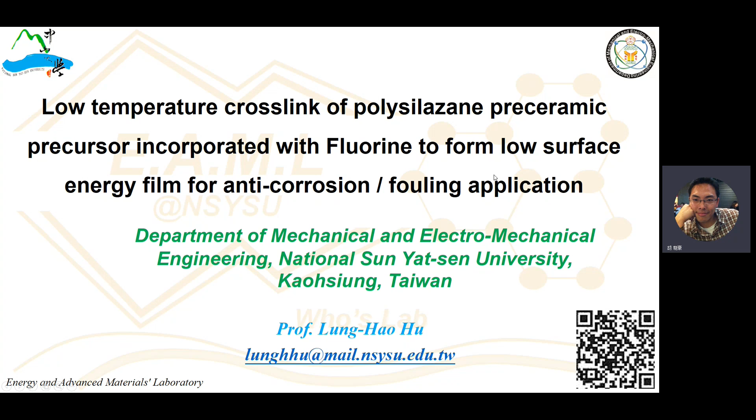As we know, there's some hydrophobic surfaces in nature, such as lotus leaves and butterfly wings. There are applications in our daily life too, such as prevention of snow adhesion, stain resistance, and self-cleaning windows. Those hydrophobic applications make our daily life easier, meaning we don't have to clean windows or jeans frequently.

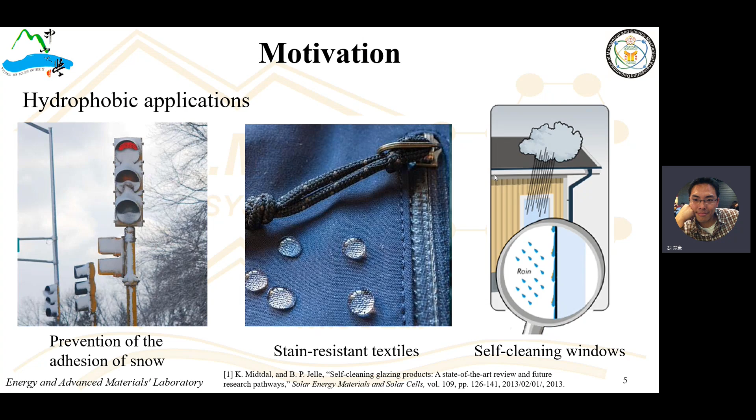The other issue of concern is the corrosion effects. Ships are inevitably polluted by oil pollution, or microorganisms in the ocean attach or stick to the ship's body. Those pollutions or microorganisms sticking to the ship body will reduce the speed of the cruise.

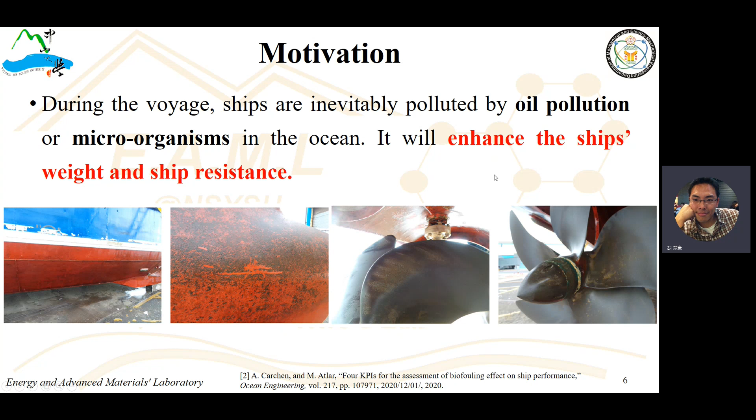Therefore, how to prevent those pollutants or microorganisms from attaching to the body is another issue we have to address, through modifying the surface free energy or the surface property. And of course there's the corrosion issue, as I mentioned.

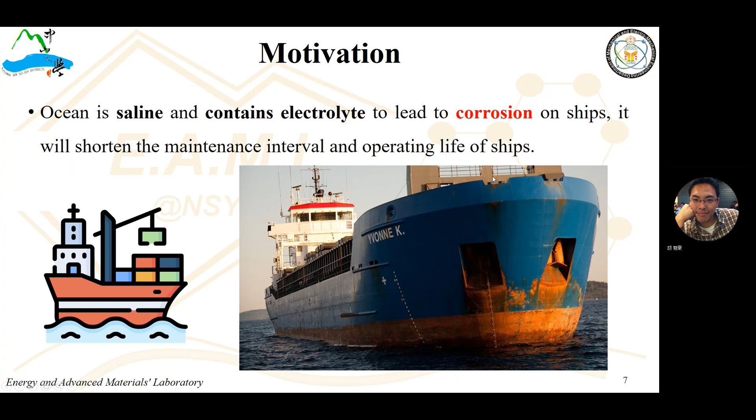For ships immersed in the ocean, the ocean acts like an electrolyte. Over the long term, this electrolyte leads to corrosion in the ship body, and it will shorten the maintenance interval, meaning the maintenance cost increases a lot if the ship body is corroded.

So for this research, I'm going to focus on two functions, or we can call it the dual function — a dual function low surface energy coating. So what's the dual function? One is anti-corrosion, and the other is anti-fouling. The materials we're going to use are called PDC, which I already introduced a lot previously.

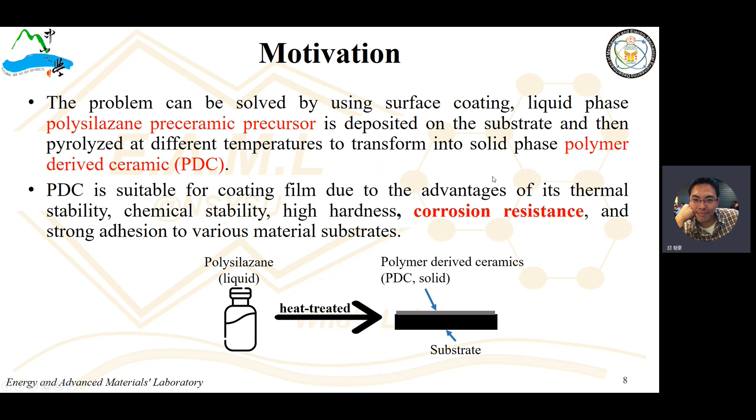In a few previous talks, the precursor is a polysilazane pre-ceramic precursor, and it can be easily deposited on different types of substrates. In this case, we're using a polysilazane, meaning this structure has a silicon-nitrogen bond right here.

If the precursor has polysiloxane, that means we have silicon-oxygen bonds. Oh sorry, I made a mistake, I have to correct it — it's a silicon-nitrogen bond. So it's a silicon-nitrogen bond.

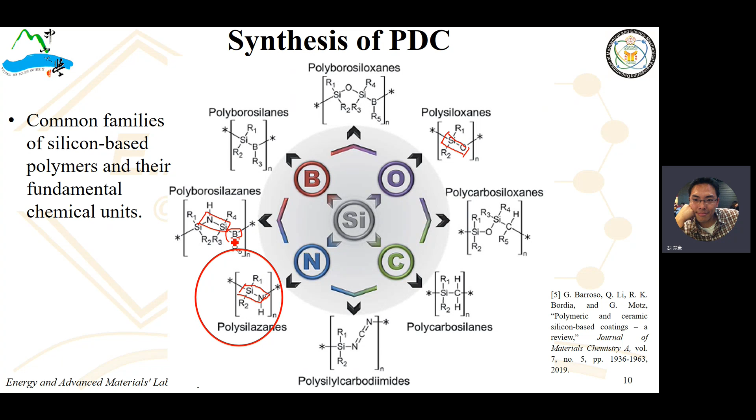And the silicon-nitrogen bond contains boron. So therefore the precursors depend on what's the bonding between the silicon and its functional group, or not.

For the coating techniques of PDC, the techniques include dip coating, spin coating, spray coating, and so on. It depends on what kind of surface you have. If the surface is not uniform with a complex shape, maybe spray coating is the optimum technique for uniform coating on a complex surface. If the surface is porous, maybe dip coating is more suitable.

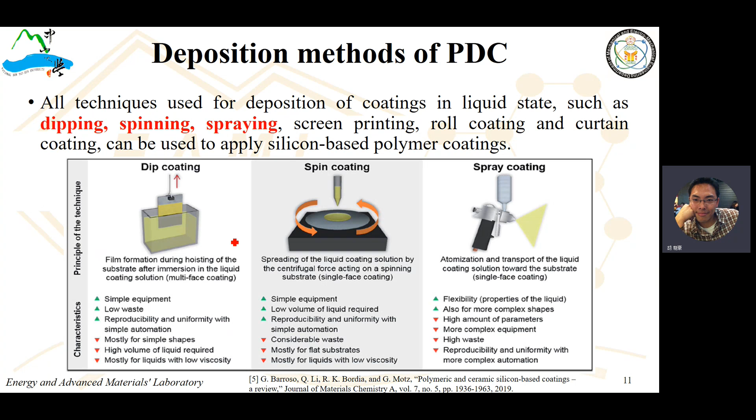The polysilazane pre-ceramic precursor can be commercially available from Merck, and its chemical structure — as I already mentioned — is a silicon-nitrogen bond with different functional groups and contains hydrogen. The polysilazane provides high thermal stability, oxidation resistance, and very good corrosion resistance after pyrolysis.

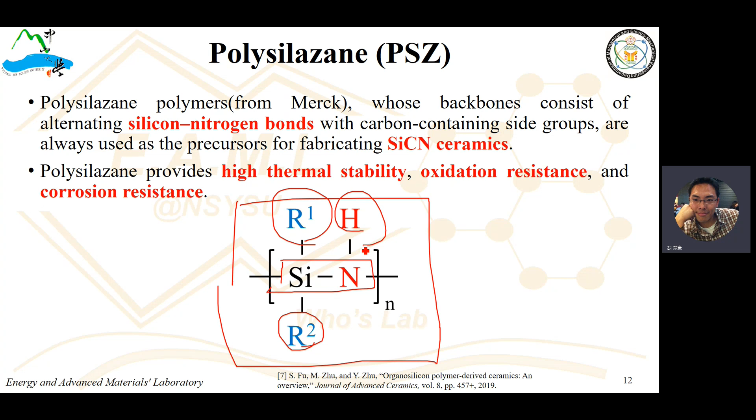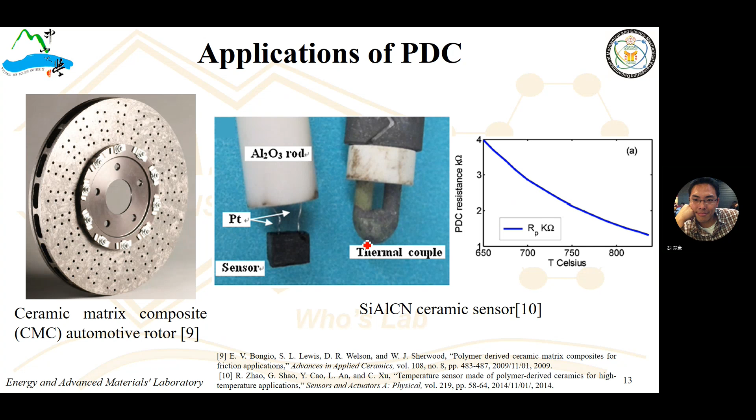There are some applications of PDCs like automotive rotors and some semiconductive sensors, which have already been commercialized. And then there's the fluorine compound — fluorine is the lightest element in the halogens, and because fluorine is electronegative with the greatest attraction for electrons, it forms compounds with other elements easily.

The properties of fluoropolymers are largely derived from the spatial features of the carbon-fluorine bond, which has one of the highest bonding energies. This high bonding energy results in low polarization of carbon-fluorine bonds, which in turn imparts important properties such as low solubility, low friction, high thermal stability, and strong chemical resistance.

The fluorine complex we use is Duravance's AF340, from Rayoung, Taiwan, and it's a fluorinated polysilazane resin. This shows its chemical structure, this fluorinated resin.

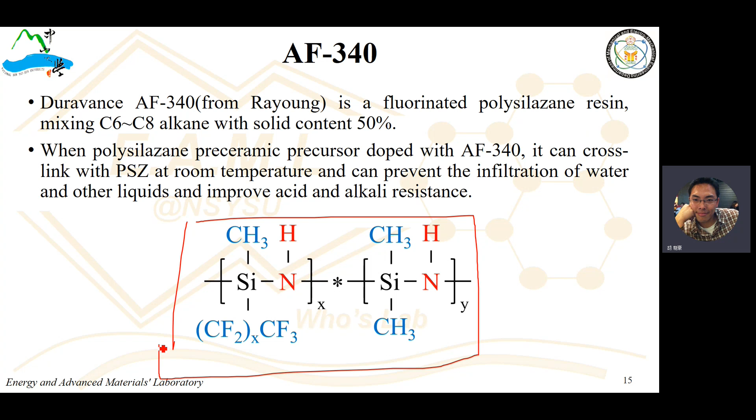When the polysilazane pre-ceramic precursor incorporates with AF-340, it can cross-link with the pre-ceramic precursor at room temperature and prevent infiltration of water and other liquids, improving acid resistance and so on.

The other material I'm going to introduce is titanium dioxide, which represents a type of broad spectrum bactericide with excellent biocompatibility and corrosion resistance. Activation of TiO2 particles with adequate UV light generates electrons and holes that react with adsorbed water and dioxygen molecules to form reactive oxygen species that can kill and inhibit the growth of bacteria.

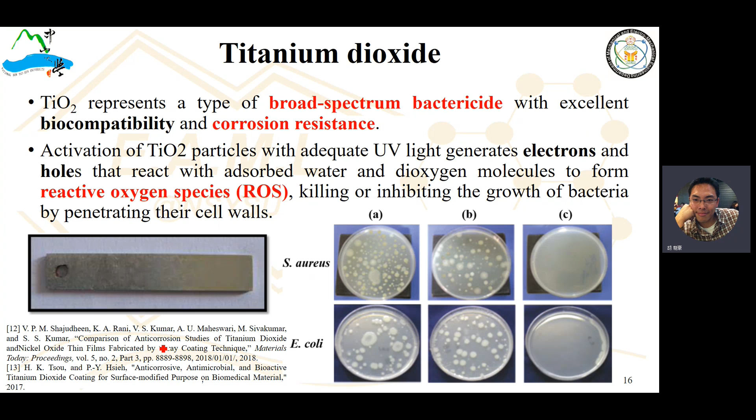The reason I introduce TiO2 is because I'm going to incorporate TiO2 with this polysilazane pre-ceramic precursor, and let's look at what its surface property is.

There's an experiment where we measure the contact angle, with different surfaces of the polysilazane precursor incorporating fluorine or diluted, or incorporating titanium dioxide. We calculate the surface energy by the OWRK method. We measure the contact angle using two types of liquid.

One liquid is water, which is the polar solution. The other one is diiodomethane, which is the dispersed solution. Therefore we can measure the contact angle of the surface, and use a table to find out the surface energy of these two types of liquid, polar and dispersed. And we can calculate the surface free energy.

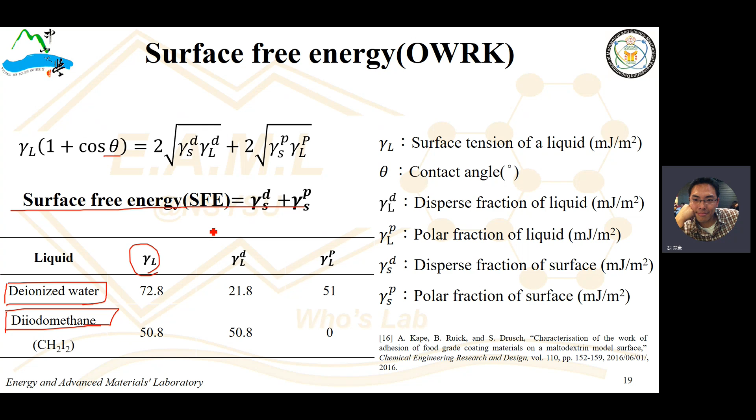Then we use the three electrode system to measure its anti-corrosion ability. The working electrode is copper coated with the polysilazane pre-ceramic precursor incorporated with the fluorinated resin or other things. The counter electrode is platinum, and the reference electrode is silver chloride. We use 0.5 mole of sulfuric acid.

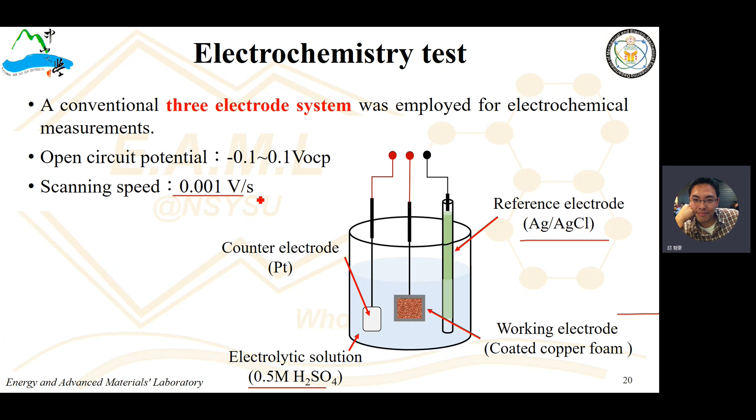We have a fixed scan speed, and we can find the Tafel curve. If we figure out the tangent of the anodic and cathodic polarization curves, we get the intercept right here, and then we can find its corrosion current and corrosion potential.

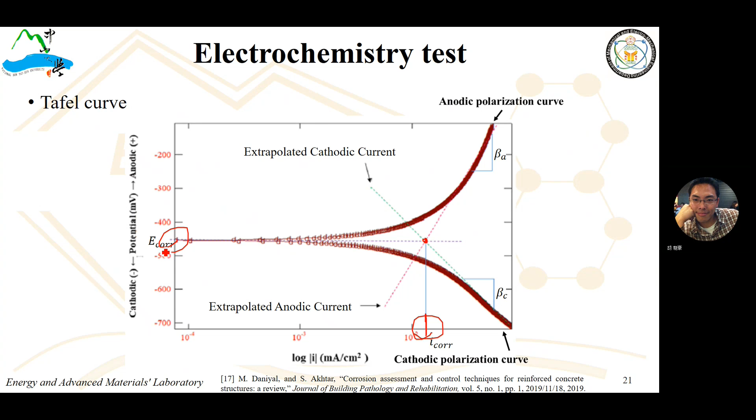Of course, what we desire is the lowest corrosion potential... sorry, that's my mistake, I have to correct it. The higher corrosion potential is what we want, and the lower corrosion current that we want. Then we can calculate its polarization resistance, corrosion rate, and equivalent weight.

Then we use nano indentation to figure out its surface mechanical property. Except for anti-corrosion and anti-fouling, we have to realize whether the surface is relatively strong. Of course it might not be stronger than some metals or alloys, however we have to realize whether it's strong enough.

This is where we use nano indentation to figure out its surface mechanical property. We have indentation tips, diamond pyramid tips, to indent the surface of the polysilazane pre-ceramic precursor after curing or pyrolysis. From its load and displacement curve, we can figure out whether this surface is strong enough or not.

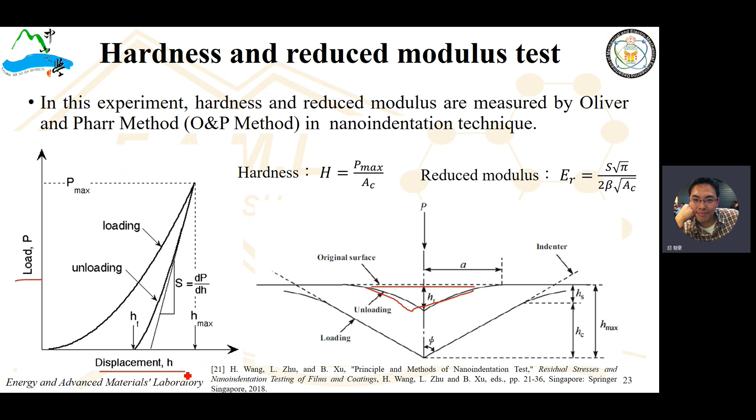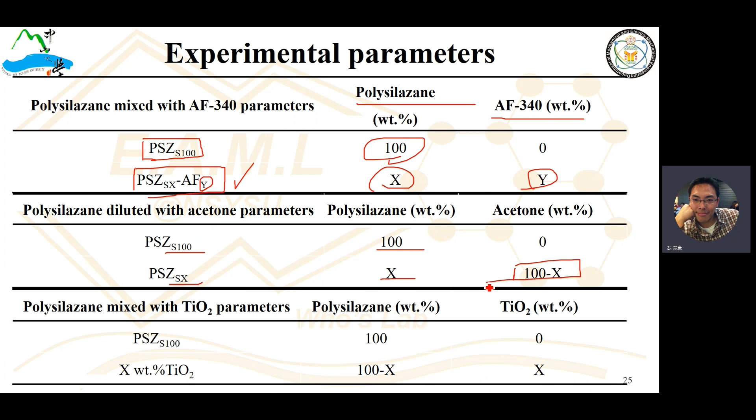Of course we dilute it in acetone. Similarly we have 100% of the pure polysilazane pre-ceramic precursor, and we have the diluted weight percent of the solution, and also the X weight percent of TiO2 mixed with the pre-ceramic precursor.

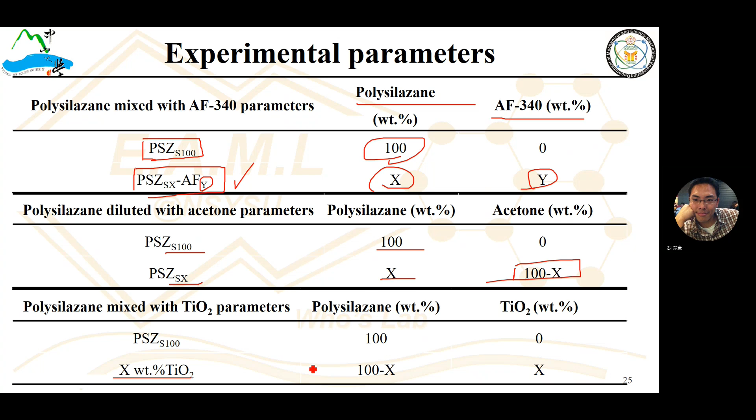Therefore, our experiment will operate below 500 Celsius.

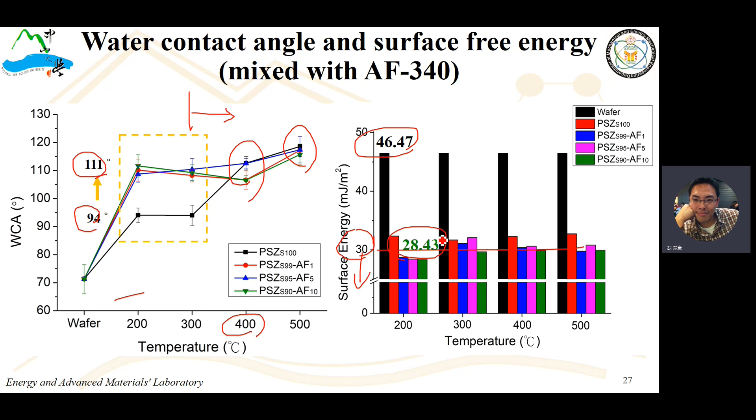So I will just mention that when this surface energy is below 30 millijoule per meter square, the antibacterial effect is generated. So this is the boundary, the limit right here. If the surface energy is below 30, that means the surface can be antifouling or antibacterial.

Oh, I forgot to mention that for hydrophobicity, if the contact angle is less than 90, that means the surface is hydrophilic. And when this contact angle is higher than 90 degrees, that means the surface is hydrophobic.

Of course, there are different criteria for this contact angle. Some will say when the contact angle is higher than 120 it's called super hydrophobic, and some will say it has to be higher than 150 degrees. The contact angle has to be higher than 120 degrees for its hydrophobicity to belong to super hydrophobicity.

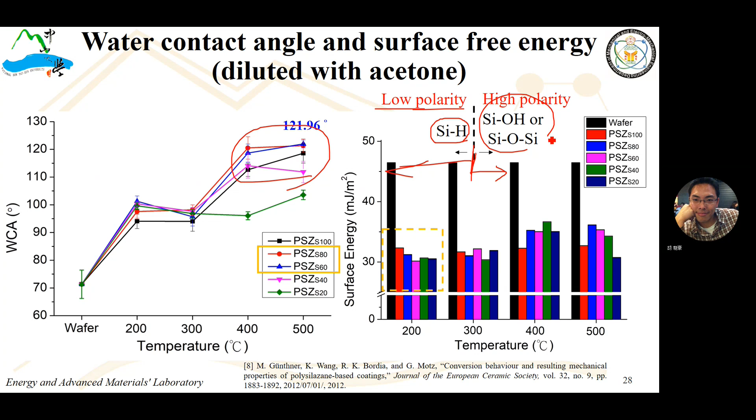However, its contact angle is not very effectively hydrophobic compared with the other compound of the pre-ceramic precursor with fluorinated compound. Well, the Wenzel equation shows the surface roughness factor versus the contact angle.

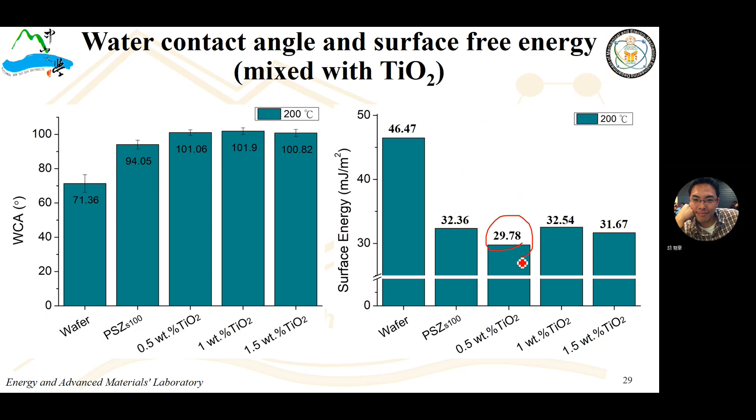And it also reduced the foulant accumulation by 97%. This evidence shows that the TiO2 or the fluorinated particles have the antibacterial effect.

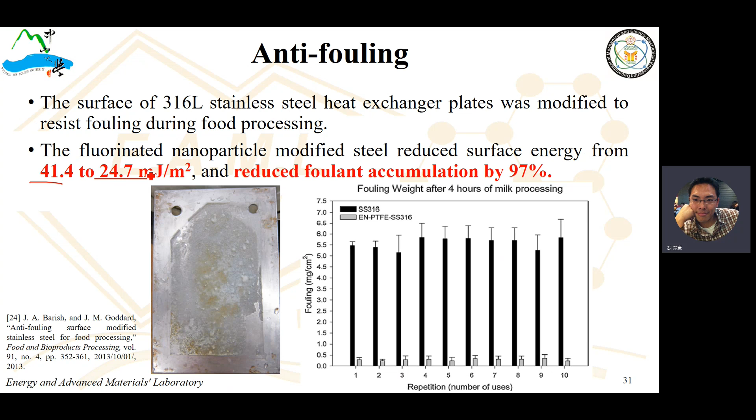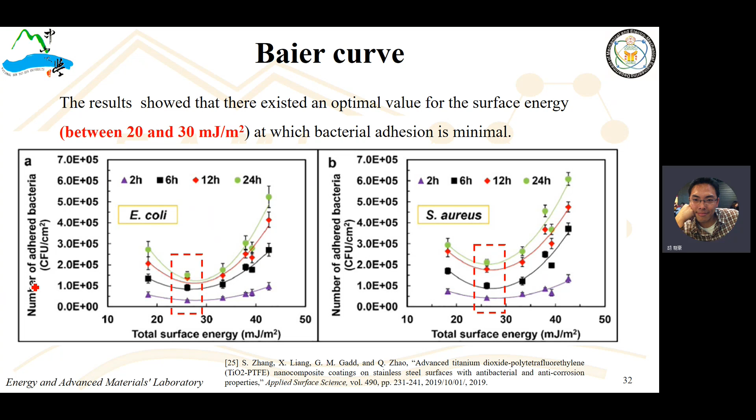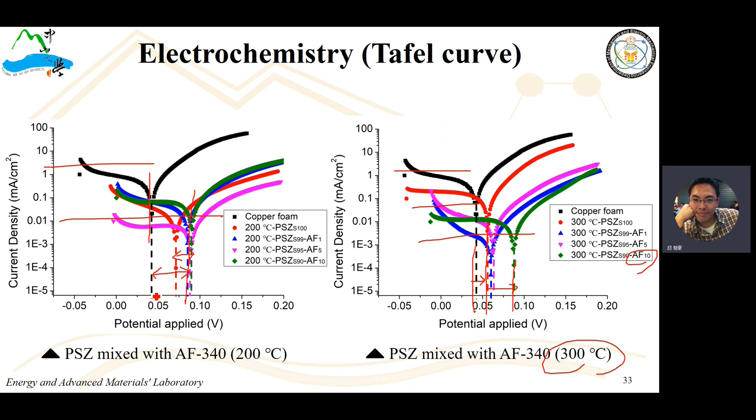Then we compare with other metals or coatings, such as different types of high entropy alloy and SS304. We compare the sample we made, this pre-ceramic precursor incorporated with 1 weight% of the fluorinated compound, cross-linked at 300 and 200 Celsius, and we compare the corrosion rate.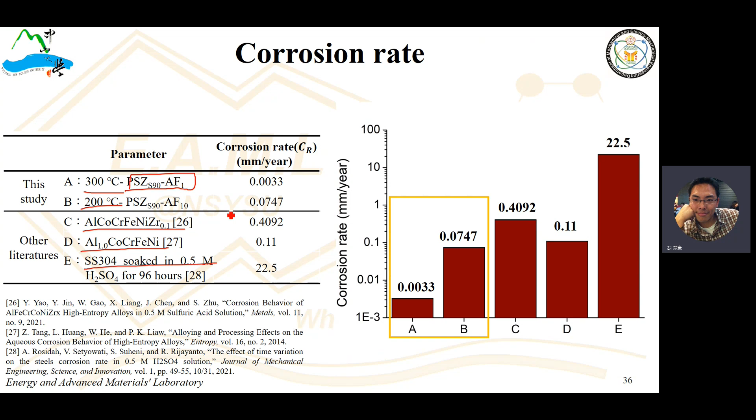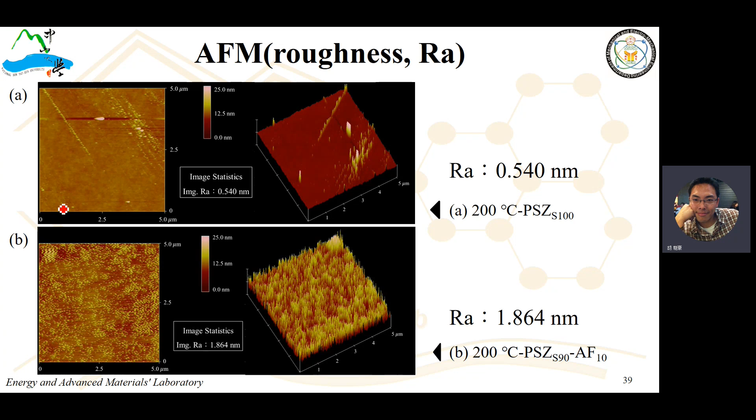When the surface roughness is smaller than 1 micron, we can regard this surface as an ideal, smooth surface, so the surface roughness factor can be neglected. But we don't have to consider whether this surface roughness influences its surface energy or not, if the roughness is smaller than 1 micron.

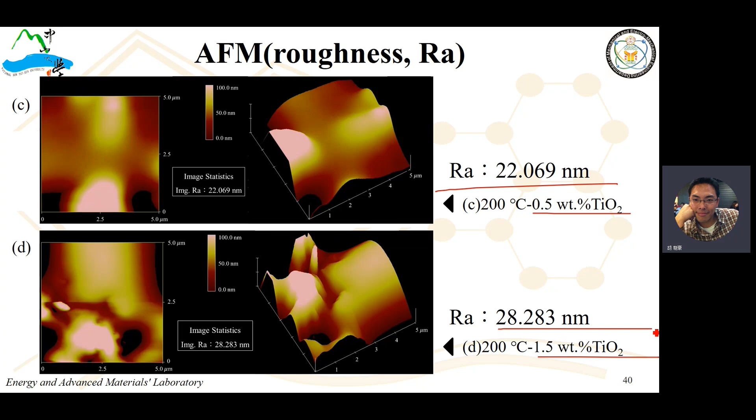Next, let's look at the mechanical property, I mean surface mechanical property, by nano indentation. The maximum load is about 1 millinewton, and we measure an indentation point array of 20 points.

So what do we get? We get the average hardness is higher with the fluorinated resin dopant. However, when the temperature is higher than 300, its surface hardness drops substantially, and when the temperature reaches 500 Celsius, its hardness increases substantially. Why?

Because around 450 to 500, these polymers start to transfer to a ceramic phase, that's the reason the surface hardness increases a lot at 500 Celsius. At that temperature, the fluorinated resin is useless, because it's already decomposed. The reduced modulus has a similar trend: when the fluorinated resin is doped, it has a higher modulus, and when the temperature reaches 400 Celsius, the modulus drops.

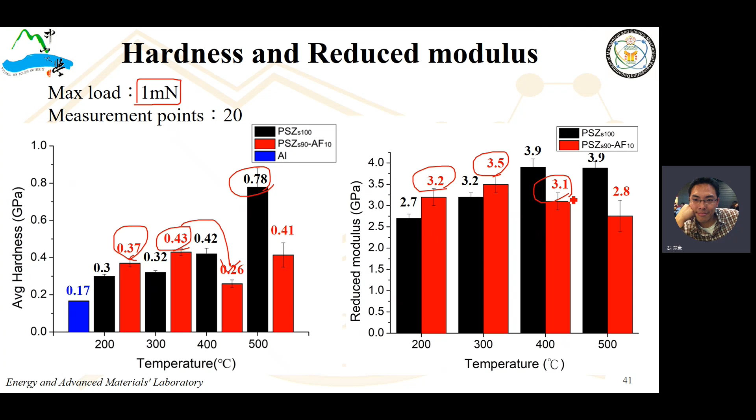This reference shows that when the surface is doped with fluorine gas, its surface hardness and modulus increase with increasing content of fluorine dopant, up to a specific limit. When the fluorine dopant is beyond that limit, the surface properties, hardness and Young's modulus, drop substantially.

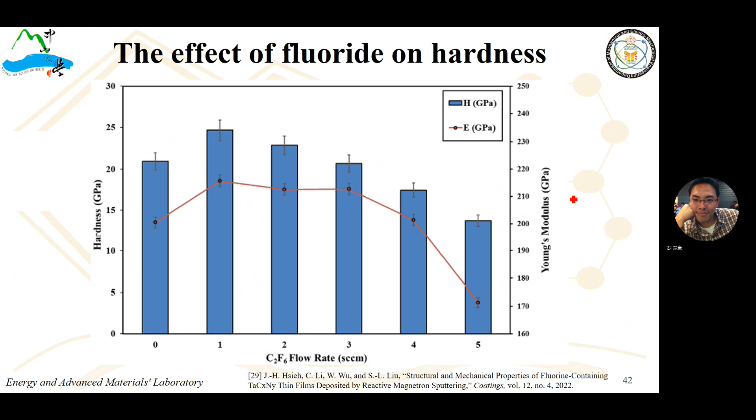We also compared different substrates. Previously we just spin coated this precursor incorporating fluorinated resin, diluted or incorporated with TiO2, and spin coated on silicon. To check whether it's functional on different substrates, we compared it with medium carbon steel, using the same process, same materials, same compound, and spin coating on the medium carbon steel, compared with coating on silicon wafer.

It's quite similar, there's no much difference. Even the contact angle, water contact angle, and the surface free energy show no much big difference. Therefore, I can say most probably it works for different substrates: metals, silicon, glass, and so on.

So the conclusion is that for the pure PSZ, meaning the pure pre-ceramic precursor, the contact angle increased from 94 to 118 with increasing cross-linking or pyrolytic temperature. When this pyrolytic temperature is higher than 500 Celsius, the contact angle drops.

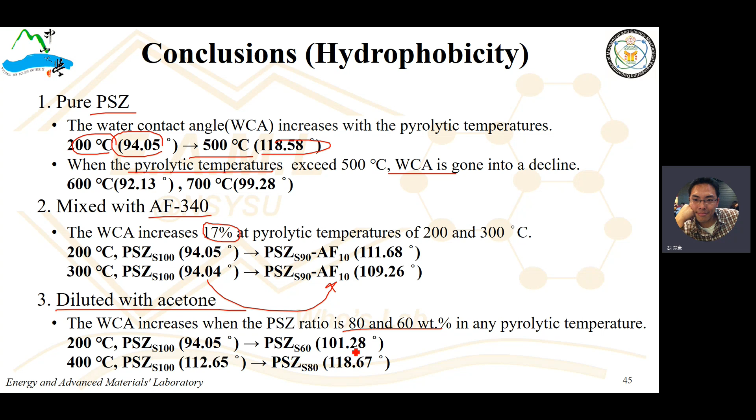And when this precursor incorporates AF-340, when we add this AF-340, its surface free energy is reduced.

For this pure precursor heated at 200 Celsius, its surface free energy is about 32. When we add about 10% of this fluorinated resin, its surface energy drops to 28. Even when this precursor is heated at 500 Celsius, this surface energy still drops.

And for the dilute acetone, the precursor diluted with acetone, we find the lowest surface energy is about 60% of the pre-ceramic precursor. It has the lowest surface free energy. However, it's still higher than 30.

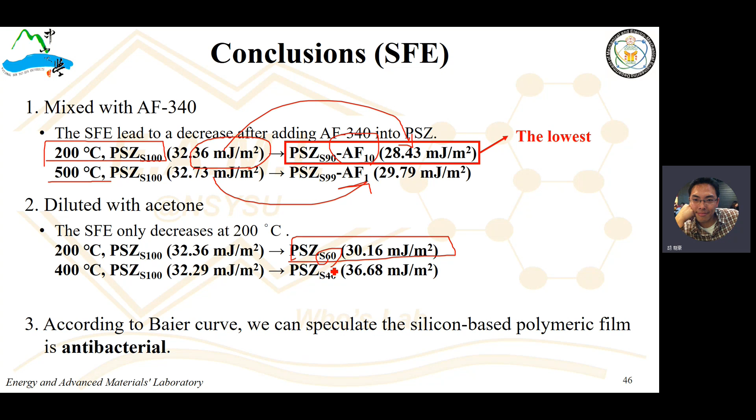We find the sample of the precursor incorporated with 10% of fluorinated resin has the lowest surface energy for this dual functional coating: anti-corrosion, antibacterial, or anti-fouling.

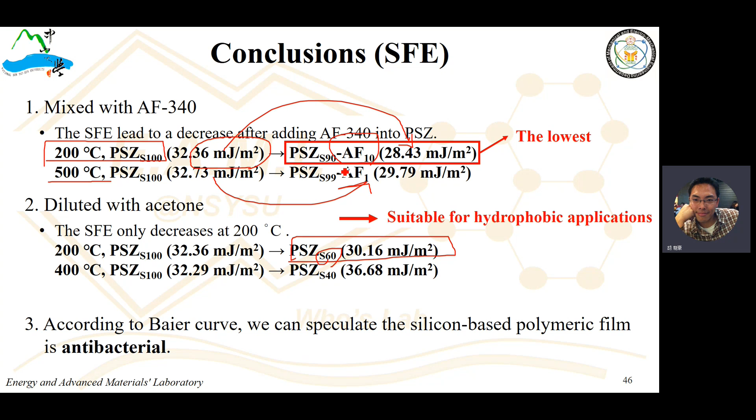If you just want to focus on the hydrophobic application, I will say maybe you just dilute with acetone - you can get the highest contact angle. According to the Baier curve, we can speculate that the silicon-based polymeric film is antibacterial.

For this corrosion resistance test, the coating heated at 200 Celsius has the highest corrosion potential. And when this coating is heated at 300 Celsius, it has the lowest current density - corrosion current density.

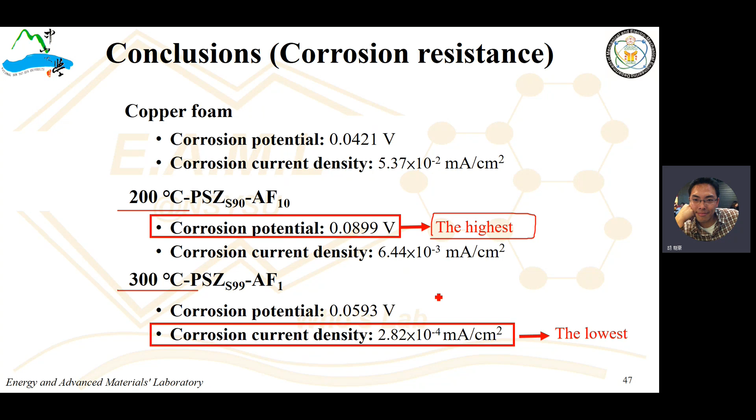We have a conclusion that when this coating is crosslinked at 200 Celsius, its properties increase hydrophobicity, have the lowest surface energy and the highest corrosion potential, and its hardness is higher than aluminum.

In this research, I just want to emphasize that the contact angle of this research is not the highest. You can find tons of papers that show, oh, we have the highest contact angle, right? You know what I'm saying?

In this research, I just want to focus on this coating - I can modify it with different functions depending on what application I need. I don't want to reach the highest contact angle - for me, that's meaningless.

For materials applications, or for industrial applications, we have to find out what is most economical and most functional, not just the highest single property. We need multifunctional properties. However, each property may not be the highest or the best, but this coating can have multifunction applications.